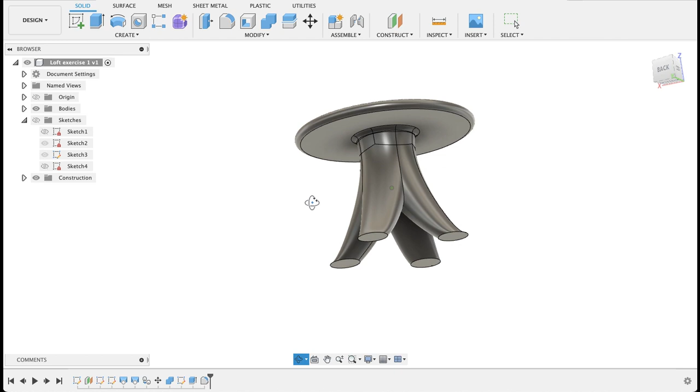Today we're going to be taking a look at how to create shapes like this using a Loft feature. We're going to be using Loft with guide rail as opposed to just a regular Loft. It just helps you to create these more organic looking shapes. So let's get started and see how you do.

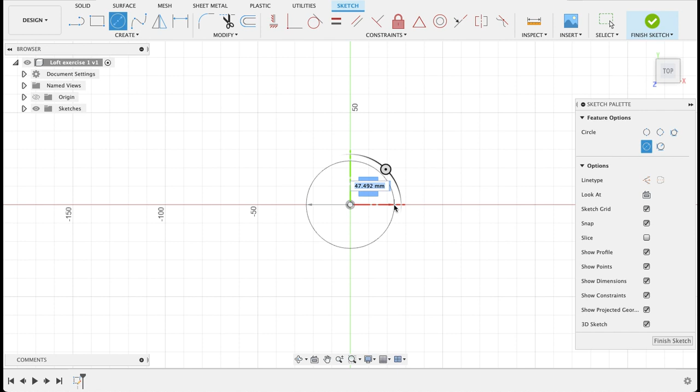To get started with this one, I'm going to draw a sketch on this top plane here. So we'll select the top plane and start with the center diameter circle. We're going to make it 300.

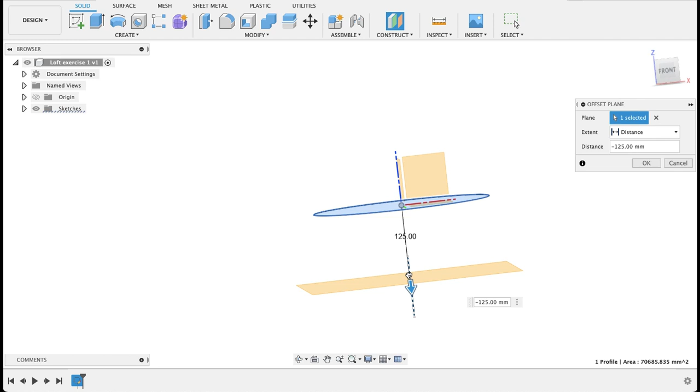Okay, so there's our center diameter circle. Finish sketch. Now we'll construct a plane off the top plane, down 600, so that'll be negative 600. Now that plane is where we're going to draw our other feet.

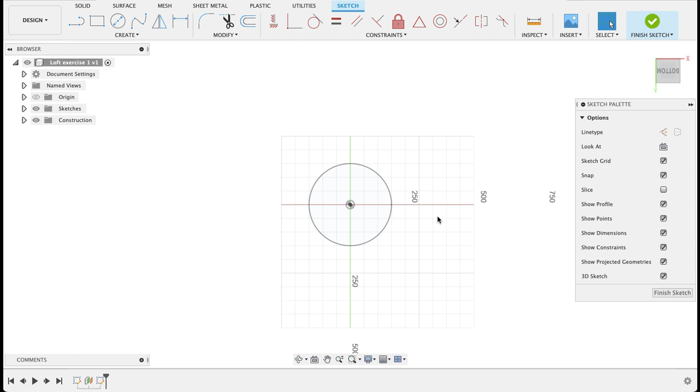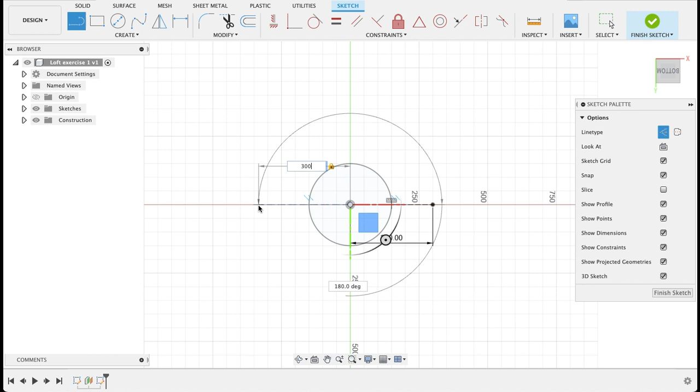So construct on this plane, and we are going to want to draw one on either side, and then we will mirror the feature or create a copy and join the bodies. I'm just going to draw a reference line here, construction line out. I want this to be 300, and I'm going to draw the same on the other side. We could have just copied this thing entirely, but I just want to draw two in here.

So center diameter, let's take construction off. We want this now to be 150, half the diameter of the center circle. Again, 150.

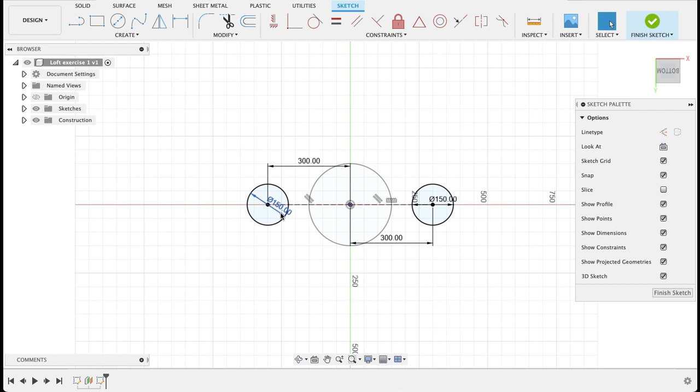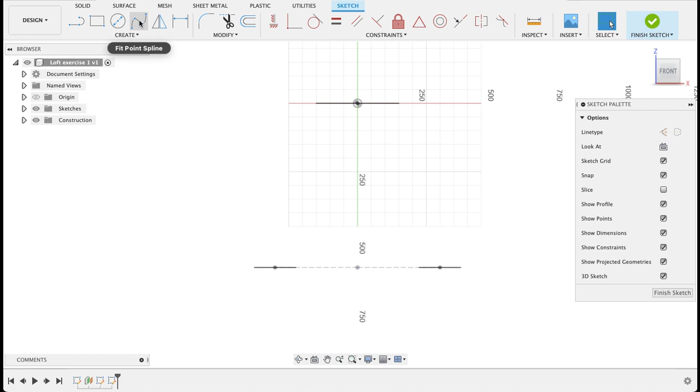So now we're going to create a sketch on our front plane, and we're basically going to create a curve along here for our loft to follow. We're going to draw a spline. I'm going to take the spline tool and make our curve, and I'll just turn this a bit. We don't want it to be crossing the line there.

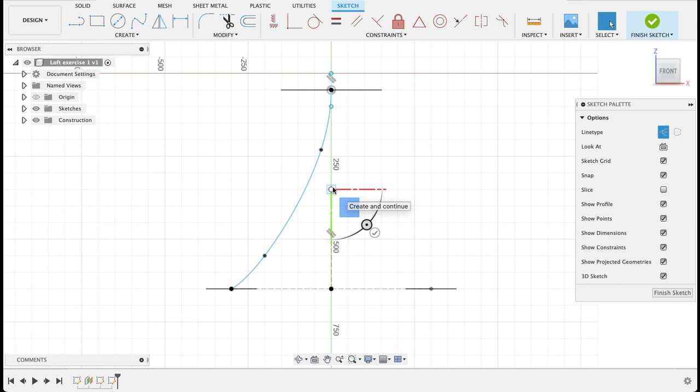So now we're going to mirror that to the other side. Just going to create a line for us to mirror on. And we're going to go mirror, select the line to mirror, and there we go. So there's our finished curve.

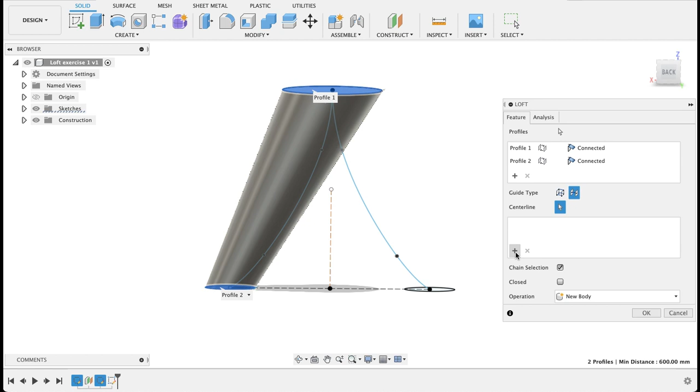Now we'll do loft, and I'm just going to show you the difference. If I loft straight between there and there, I get that shape, so it's straight. But if I use a rail, I'll select the center line and I'll select that. We can see it curves nicely with our center line that we've drawn in.

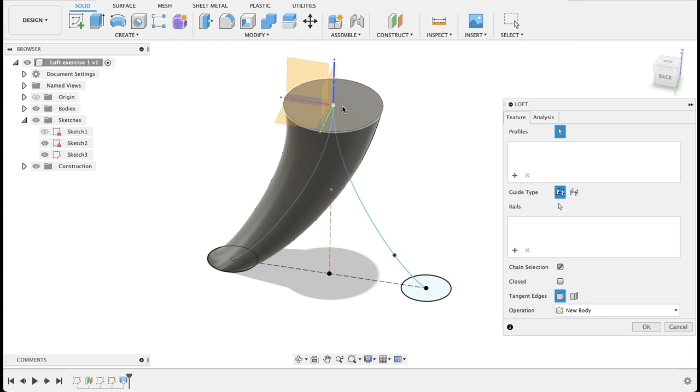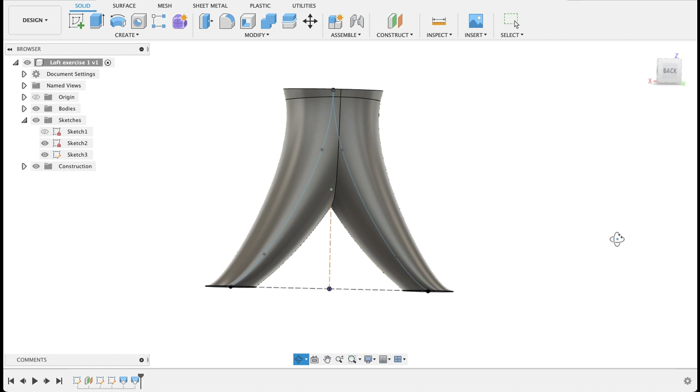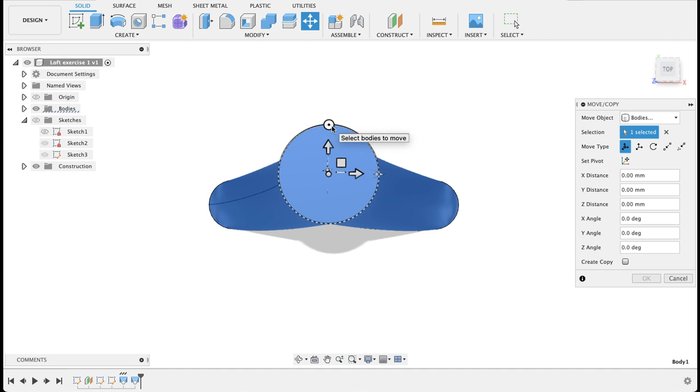So let's turn these sketches off, and now we'll copy this body. So copy, I'm going to select this body, but I want this to be at that point there, so our pivot is in the middle. I want to create a copy.

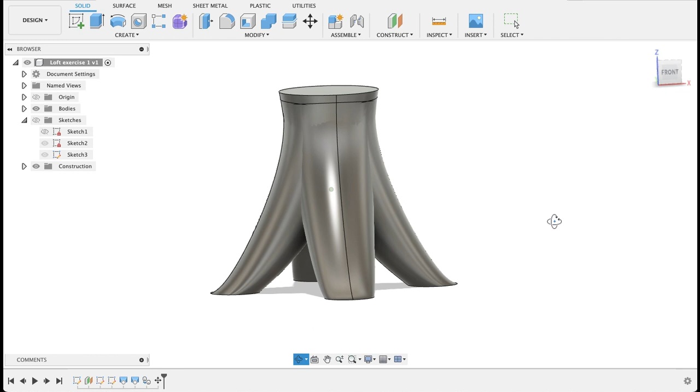So copy, I'm going to select this body, create a copy, and we'll just turn that 90. So now we've got our shape, but it consists of two bodies. So I'm going to select these two bodies, click combine, and it's back down to one body.

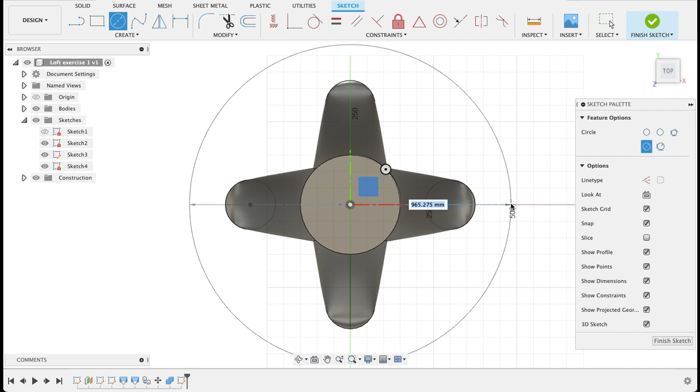Then what we'll do is we will draw a sketch on this top plane again, and a center diameter circle. So that comes out to 600. We'll put that about 900, 900 will be good. So now we'll extrude this surface up. We will go up to 50, and it's a join operation.

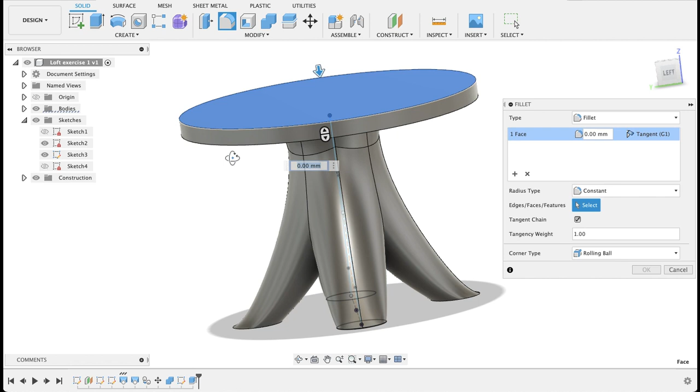So there's our table, but I want these edges to be rounded off. So I'm going to select top and the bottom, so it's an entire center line, and we'll go 25. So it'll give us a full round because it's 50 thick. There we go, and let's just turn sketch off.

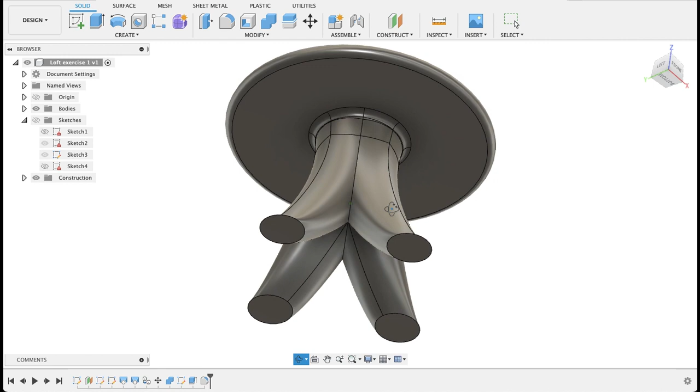So there you've seen how we can use Loft with a guide rail to create sort of organic looking shapes. If you look closely, you can see it curves out at the top, and we've got our flat feet.